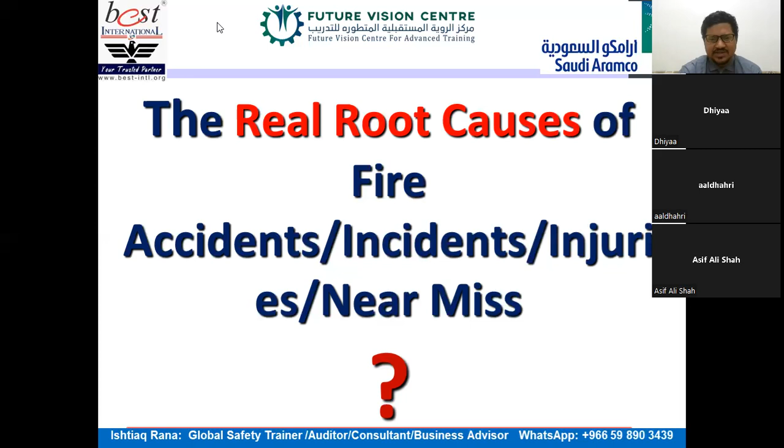But in that context, bear in mind these few pictures I'll highlight, which will give you some idea how sometimes, and here no lack of knowledge - everybody knows overextension boards or over usage of an extension board, overload on any extension board would be dangerous. Especially, that is why plenty of incidents are happening in employees' accommodations, several, because everybody has chargers, laptops, and no time to buy new extensions. The same extension board, they are trying to use it and have no idea what can go wrong.

Housekeeping - poor set and order, poor housekeeping, no standardization is another reason. Accumulation of different waste coming together, hazardous, non-hazardous, flammable, non-flammable, mixing together - again, you are creating more probability or chances of fire incidents. And sometimes, yes, the behavior, the mindset of our employees, sometimes the unsafe conditions.

So the human, and we all are human beings, you know. I can manage maybe 10,000 machines more easily, but managing 1,000 different brains is one of the most difficult jobs in the world, because everyone is different and everyone is not emotionally so intelligent also. You never know how people can react.

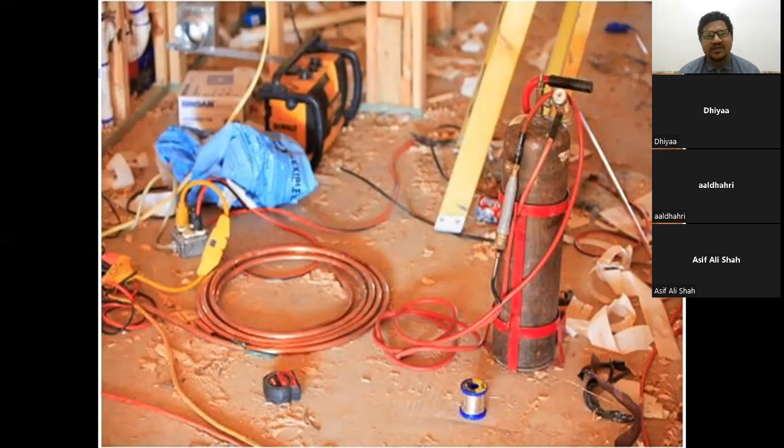Now we are in a position to discuss what is fire. It's not hiring and firing. It's only fire. So we all know it's a combination of oxygen, heat, and fuel, and of course a chemical reaction.

So what is the best idea for firefighting? Fighting fire, at least one element we need to remove, right? Either you remove oxygen, heat, or fuel - at least you have to break this triangle. Fire wouldn't be there anymore. But sometimes it's not easy.

But what exactly can you do to have better control around these three elements and not let them meet together, putting a fire somewhere in a company, God forbid. Because sometimes the owners, the employees are sleeping at home, and within the whole night the company is burned out. And the reason later found is electrical - the joints were there. So because of overload, because of less load, because of short circuit, the whole company is burned out.

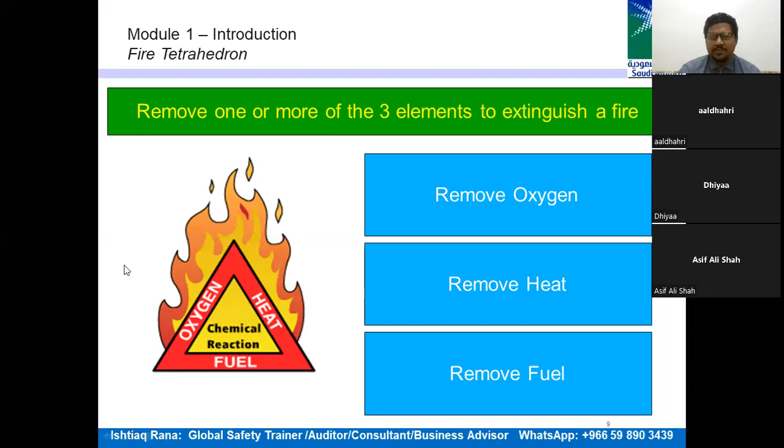Now, how are we going to respond? The first thing is the rescue, then is the alarm, then contain or extinguish. So RACE - race is the important word to bear in mind. Rescue, alarm, contain, and extinguish.

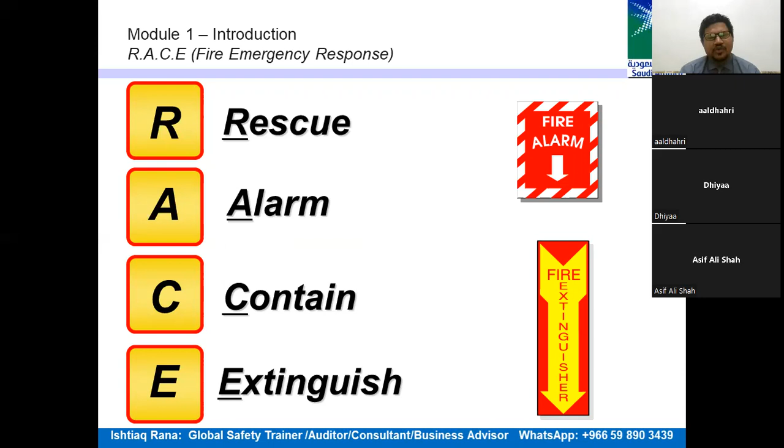Once you remove the other fuel, basically you are containing that fire, not letting it spread to any other areas. So you keep it contained in that area. Otherwise, you extinguish - you take the fire extinguisher and follow the PASS process.

We call it pull, aim, squeeze, and sweep. If somebody asks you how to use a fire extinguisher, tell them it's simple. We need to follow PASS, the word, the 4 steps of PASS.

That means pull the pin. If you see the picture - pull the pin, aim at the fire, squeeze, you need to press the handle, and then sweep. Sweep like this, but at the bottom of the fire, not in the middle, not at the top, from the bottom. You create a layer, and of course you have to be very sure about the wind direction - what is the wind direction?

Keep your distance from the fire, because your safety must be your first priority, even as a firefighter.

If you have any fire extinguisher available in your office, you can have a look at it. The first step is to pull the pin, but don't pull it yet, because I'm just sharing practically, like you can see the fire extinguisher available already in your office.

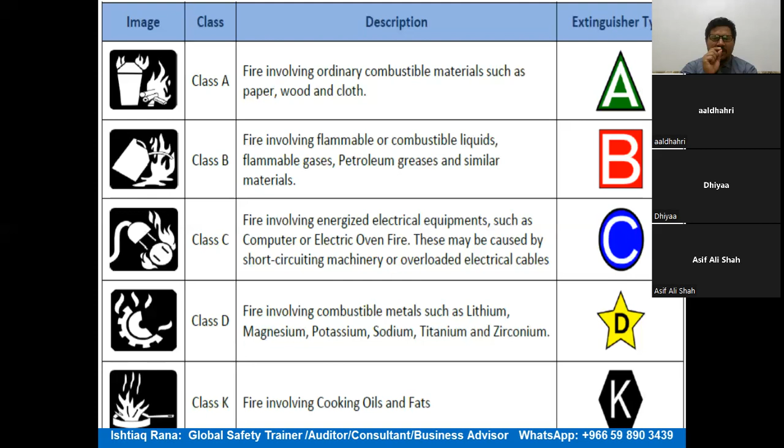So there are 5 classes of fire: class A, B, C, D, and K. What's important for us to understand is that any fire caused by combustible materials such as paper, wood, and cloth falls into the class A category.

Class B is all relevant to fire involving flammable or combustible liquids, flammable gases, petroleum greases, and similar materials. That all falls under class B.

Then there is class C, which means fire from energized electrical equipment such as computers, electric ovens, etc., possibly caused by short circuiting machinery or overloaded electrical cables. So that's class C.

Then there is class D, involving combustible metals like lithium, magnesium, potassium, sodium, titanium, or zirconium. These are some of the combustible metals, and that all falls under class D.

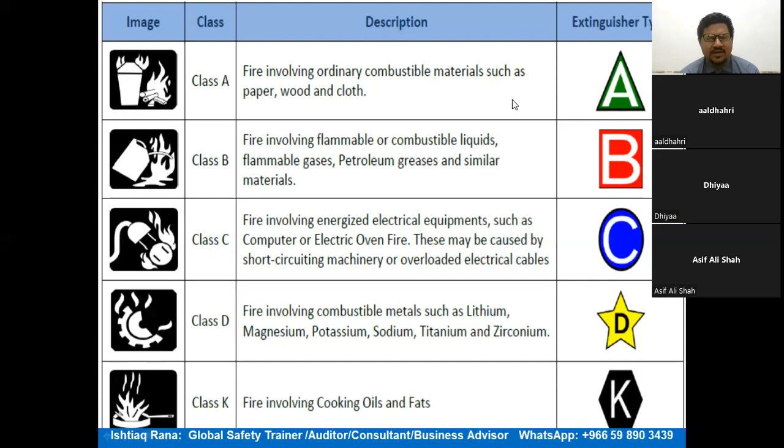Now, according to the class, which fire extinguisher we have to use, we are going to discuss in the next slide. Class K is fire involving cooking oils and fats. Normally, if you don't have a kitchen, it's not a very big risk, but if you have a kitchen inside your office or even at your site somewhere, you surely have to understand class K also, and how to fight that.

So what you are doing is breaking that triangle of heat, fuel, and oxygen. Sometimes you remove heat, no more fire. Sometimes you remove oxygen, again no more fire.

If you have a lighter, whether you're a smoker or not, just put your hand up over it. That means you are stopping the oxygen. Now click it several times, there won't be any fire, because you've stopped and eliminated the oxygen supply, so fire will not start. Even though heat was there, creating a spark, and even though the fuel, the petrol, is already there inside your lighter. Now remove your hand, don't put your hand at the lighter.

Now make sure, if there is no fuel, even if you click and oxygen is there, heat is there, still no fire. This triangle has to meet together and create a chemical reaction, then of course the fire would be there. So for class A, we can use water. And what is class A?

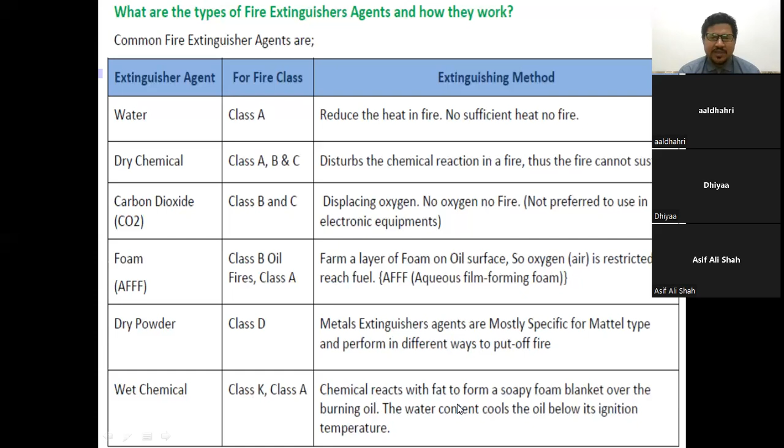Otherwise, for the wet chemical, we use it for class K and A. The chemical reacts with fat to form a soapy foam blanket. I'll share some videos that will give you practical insights into what I'm talking about, and how different types of fires are managed by using different extinguishing mediums.

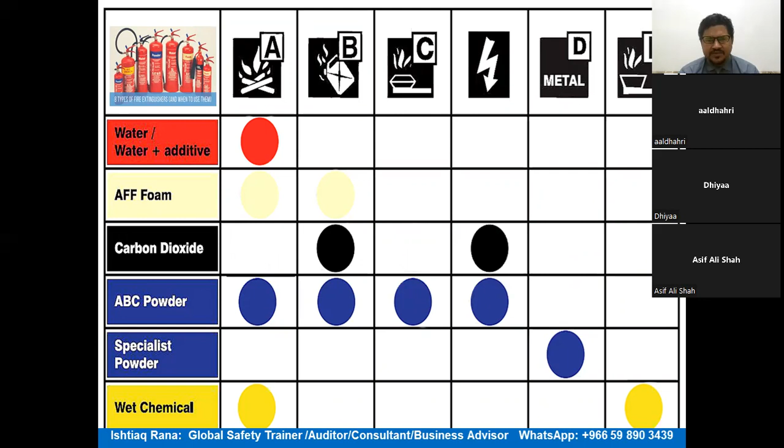We can make a chart like this and put it somewhere on our notice boards, so it will help people understand, for which type of fire, what type of fire extinguisher or extinguishing media they have to use.

Now, what are the key responsibilities of the firefighters. It's a very quick kind of reaction, if somebody reports there is a fire; if nobody reports it, the system should report. That is why we have heat detectors, smoke detectors, fire alarm systems, and locations and zones are divided. So our fire panel will start blinking, and even the sound is there, so we can find the location quite easily, in which zone number, in which particular office number this issue has arisen.

So the firefighters can directly go there. If that location is not easily traceable, then it will be too late, God forbid. That is why our addressable fire alarm system should be in place. I repeat again, our addressable fire alarm system should be in place and fully active.

Sometimes we have it, but our fire alarm is not giving the correct messages, or maybe there's no maintenance. You have an outside third party company, but they're not doing their job the way it should be, and ultimately your system is not responding in case of emergencies, because you need to know the location immediately.

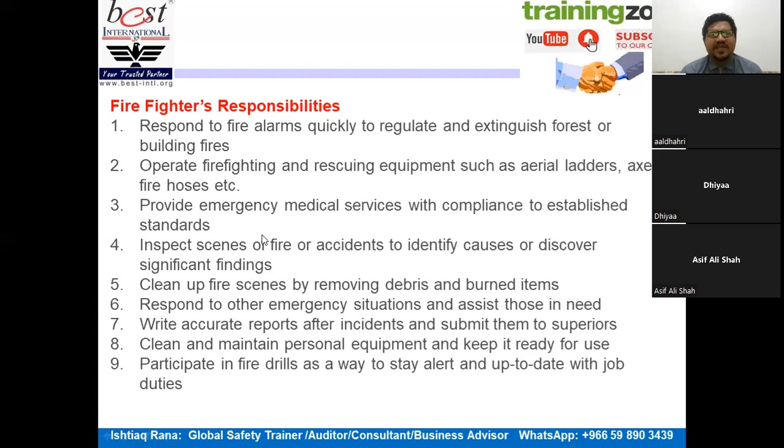Whenever you believe the fire extinguishers are ready for refilling, or you are going to send them for refilling, have a firefighting drill. Use that powder, use that extinguisher to train your employees, and then send it for refilling. But make sure you have a backup. Sometimes two sets are there: one is going for filling, the other you are putting on the walls again, so you don't leave the area empty without fire extinguishers.

There must be some fire watches, used for spot management. If any hot work is going on, especially working with Saudi Aramco projects, then a fire watcher is mandatory. Even in the work permit, you have to agree who will be the fire watcher, what is the ID, and the name or something like that. But make sure that fire watcher is there, and he must be well trained, especially how to use a fire extinguisher.

How to ensure housekeeping all around, and making sure he has an understanding of any expected ignition sources and how to manage them. He will not let anyone keep flammable materials near this hot work, maybe up to 35 feet or more. He will not let anybody put any flammable material within that area, especially if the project belongs to a confined space, which is already a terrible red zone, because the smallest mistake and it's hard to get a second chance. That's why we need fire watchers.

So they are the spot responders. If a small fire comes out from the welding process, they'll use a fire extinguisher. Any hot work going on, we need a fire watcher, and fire watchers and firefighters on the same project. Sometimes people use the same person, but it is recommended the firefighting team should be entirely separate.

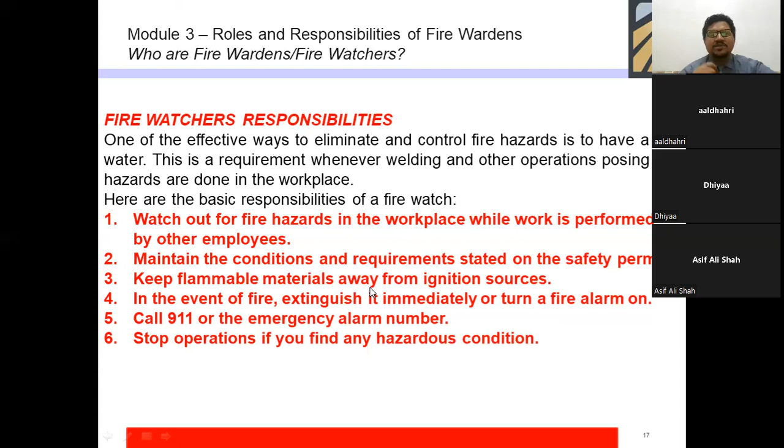How to call 911. It's not just the fire watcher, even every employee of your company must be trained in emergency reporting, like how to call 911. They must be trained enough.

Fire wardens, like I told you, help you evacuate and make sure no one is left inside. They're responsible for head count also. They have a fire safety plan for their respective building or site.

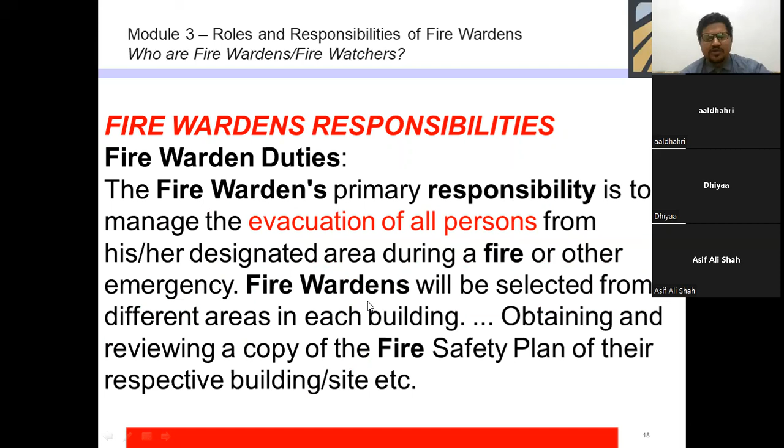No harm in having a safety committee, and make sure there are some leaders, fire team leaders, fire wardens, and fire watchers. They'll be under fire team leaders. And of course, the supportive department: you need security, telephone operators, and the firefighting team. That means you, so fire wardens, fire watchers, and the firefighting team.

And why do we all need to make sure our interested parties, our stakeholders, especially our employees, contractors, and visitors are safe? If I'm coming to your site, my safety, no doubt, is my responsibility. But since I'm your guest, you also have to play some role.

Maybe you will give me induction, telling me the restricted areas, and guiding me that these are the areas you are not allowed to go, and don't go anywhere without one of our employees, or without a guide. Actually, don't go in any area, because I'm the visitor. You are living there 8 hours, working 12 hours every day, so you know much better than me about your site.

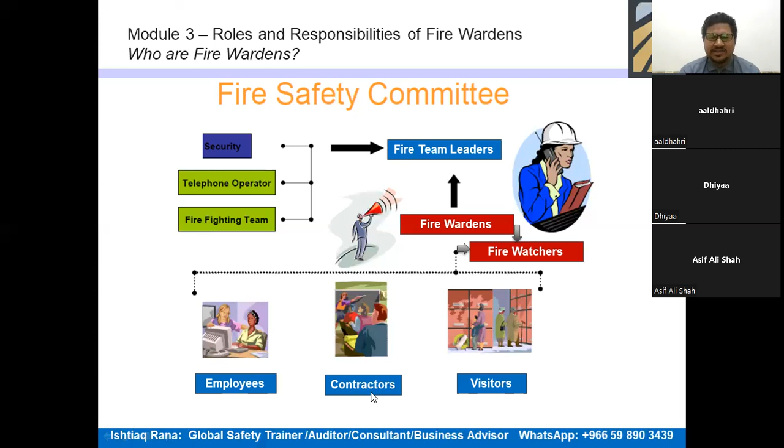How many restricted areas are there? What are the lines of fire you have defined? I need that induction. In case of emergency, to whom do I need to report, where are the muster points, where are the restricted or prohibited areas. As a visitor, I'm not allowed to go there, so all these things must be part of my induction program, the safety induction. Sometimes we miss that, because since I'm the safety auditor as well, several times I personally noted they don't give induction yet, but the guys are already on site.

Fire prevention is better than firefighting. Firefighting means you are waiting for the fire incidents or something to happen. No, surely you have to fight, you have no other option, right? But prevention is important. So how can you prevent fire?

Make sure you are managing the major causes of industrial fires, like combustible materials, electrical problems. You need to reduce them 100%. It might be challenging, but at least you try every day to make sure no electrical issues are there. Heat and ignition sources are well identified and controlled also, and machinery and smoking, like a no smoking policy must be well published, especially within your company premises, especially in confined spaces where it's zero tolerance, no smoking at all.

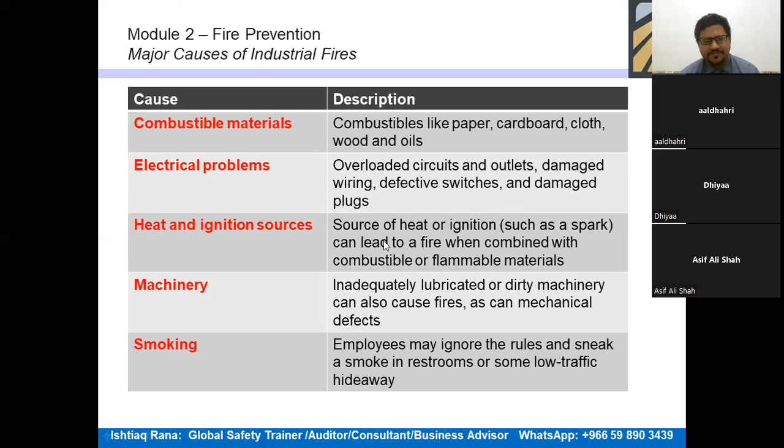And there must be some safe smoking areas that should be used by the smokers. Firstly, you must discourage, or encourage them to leave this smoking habit. But if you believe they'll not leave, then make sure you deploy or designate an area as a smoking area for the employees. The ultimate challenge is to remove one of the elements of this triangle, either oxygen, heat, or fuel.

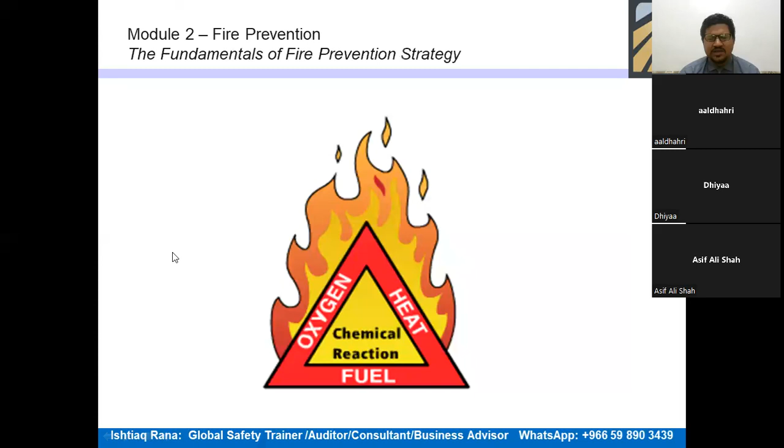Fire risk assessment should be done through your safety department. Some companies have started hiring a fire specialist separately, or fire safety engineer, same like process safety engineers, because it's an engineering job as well. Like we have a safety officer, but he's mostly busy in documentation, inspection, and all that. But we need people who have some engineering background, so they'll go deeper to understand the process.

And the root causes, and proactively they'll be putting some plan in place. So the fire risk assessment should be done through engineers along with the concerned department heads, even by involving the employees. It's not like I'm the safety professional and I'll be doing everything, with no need of involvement of any other gentleman here. It shouldn't be one man show. If you are doing risk assessment, it should be teamwork rather than doing it by yourself.

But what exactly do we need for fire risk assessment? It's a process of gathering information, like all the information about the BOQ. In my case, if there is a building and I need to go for fire risk assessment, I'll ask where is the BOQ, bill of quantity, whatever material you have used, either flammable or non-flammable, as per which international standard you purchased them, how many incidents previously happened, God forbid, within the same building, any fire incident.

So I'll collect the data, check the history, ask several questions, and get the complete data of that building, and then try to start my risk assessment process with more practical intention. Then fire hazard identification, I would go around the site, maybe the building, every nook and corner I'll be visiting and find out, maybe with a fire hazard identification checklist and all that. That would also be another element, but it should be part of information gathering.

Information gathering means finding out where they are today and how they are managing, how they are conducting this fire risk assessment. Then you go for fire hazard identification, then you evaluate and make sure you identify the red zone areas, which are the issues that have more probability of being the reason of a fire incident. So you start controlling those areas first, and of course it's a game of implementation. Once your plan is ready, all controls you have decided, now implement those controls and make sure you have a periodic review as well.

And this is how, as a fire safety management system, you try to have some policies, procedures, different kinds of controls and precautions well implemented. Bear in mind, implementation can never be effective until you train people. So training, training, and training, sometimes even refresh training, because you are implementing what you want to implement.

How many systems are there? Like firefighting, the fire safety management system, fire prevention system, waste management system, your shop floor management system, meaning full housekeeping standardization, and plenty of environmental management systems. It's a combination of different management systems well implemented, and this is how you are supporting and making sure of less chances of fire incidents.

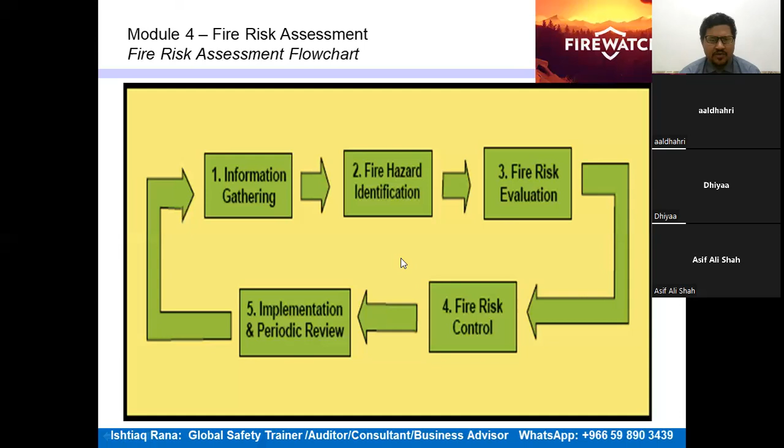So the controls we can't implement until we have complete evaluation, and once the controls are defined, make sure you implement them properly, and there must be a periodic review. This is the process of fire risk assessment.

And this is how you will find the areas rated as major, moderate, medium, or high. Every company has a different magnitude, like they might give numbers 1 to 5. So 5 multiplied by 5, if the risk comes to 25, they will rate it as high. That's all your safety department would be doing.

But make sure whichever area you are mostly concerned about for fire incidents, ask your safety department, can you share with me the fire risk assessment of that particular area? That should be your interest, since you are going to be the firefighter. Make sure you understand the sensitivities of each area.

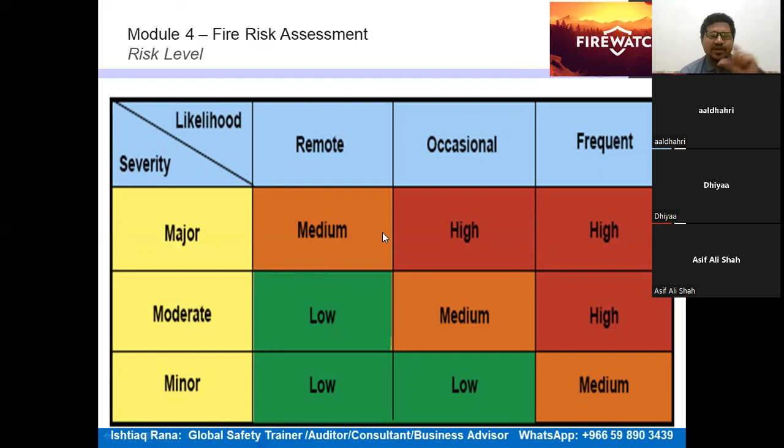So there is likelihood and consequences, very likely, unlikely, or highly unlikely. Once we do fire risk assessment, we get a rating like low, medium, and high. Of course, if it is high, more fatalities, more major injuries could be possible, even minor injuries. But that risk assessment must already be there. Otherwise, if you are the one going to do it, make sure you have separate fire risk assessor training. This is a separate, detailed training session.

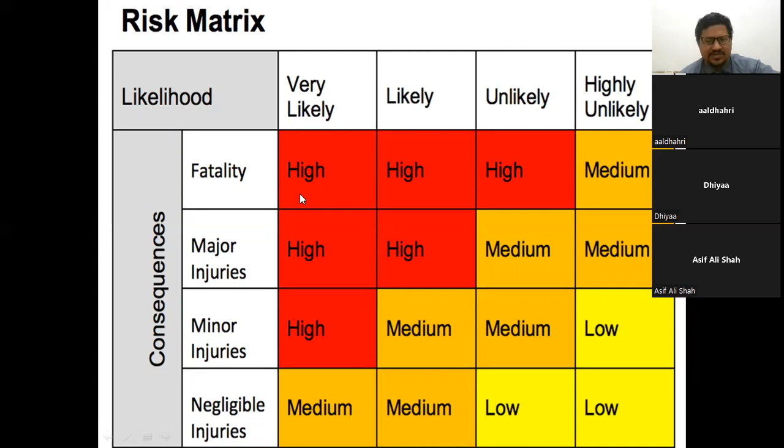But here I'm just giving an overview. Whichever area you are concerned about, just ask your safety department, can you share with me the fire risk assessment of that particular area? Then you would have a better understanding. So how can we put some controls? There is a hierarchy like elimination, substitution, engineering controls, administrative controls, and PPEs.

Like if you're using solvent based paint and it's extremely flammable, eliminate it and find a substitution, use another paint, water based, which is non-flammable or very less flammable. So in that context, you are eliminating the extremely flammable materials and bringing in materials with zero flammability. Otherwise, you start implementing engineering controls, administrative controls, and PPE.

Engineering controls, elimination and substitution, we can put them under engineering also. Sometimes we do overhauling, remove some of the parts, make sure the right maintenance of our tools and equipment. And what we are doing is minimizing the chances of fire incidents also.

Otherwise, we rely on administrative control. We give trainings, we have complete different checklists, warning signs, proper trainings, toolbox meetings, induction programs. So all this comes under administrative controls. And ultimately, the last solution is the PPE, but I would say the appropriate, suitable PPE, personal protective equipment.

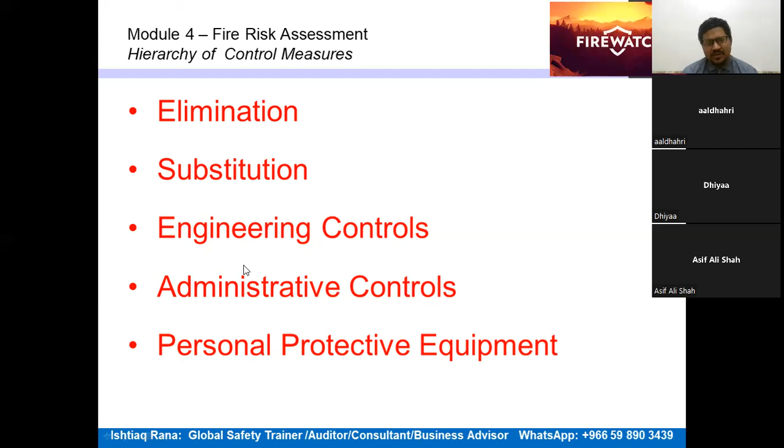So these are some of the parts we have as a fire safety system. Make sure you have smoke or heat detectors, break glass, manual call point, alarm panel, exit staircase, so easily you can go to the muster point, fire door, sprinkler, corridor, lobby, staircase, escape route, hose reel, and extinguisher.

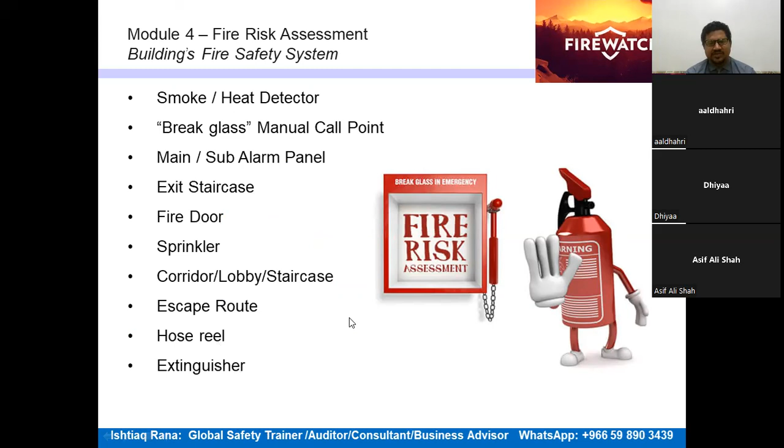Sometimes you are creating so many new areas, but this plan is not updated. So you can have a look into it, and no harm to have a fire evacuation drill and note down the time, within how many minutes or seconds the people come outside the site or building and go to the muster point or assembly area. So it's kind of a practical demonstration.

Whenever you have fire drills or fire evacuation drills, collaborate everything and train each individual. And for that reason, companies sometimes call us as a third party, just as a watcher, a silent observer, making sure that you guys are following the right set of procedure. And we will give a report, either it's a successful or unsuccessful fire drill, along with some corrective preventive action.

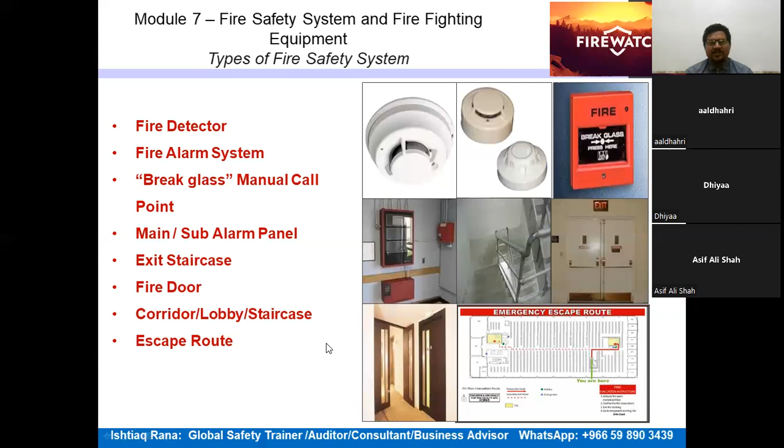If you get excellent services from your third-party companies, you are supporting your business operations excellently. This is how you create a business excellence management system for your business continuity, optimizing all your processes every day. So I hope it will help, inshallah.

Make sure that whatever company you hire as a contracting company, when they come and check the complete system, they're not giving you the wrong report. Ask them, we need a genuine report. If something needs to be changed, buy the new one and tell them to change it. But don't just give us okay, okay, okay.

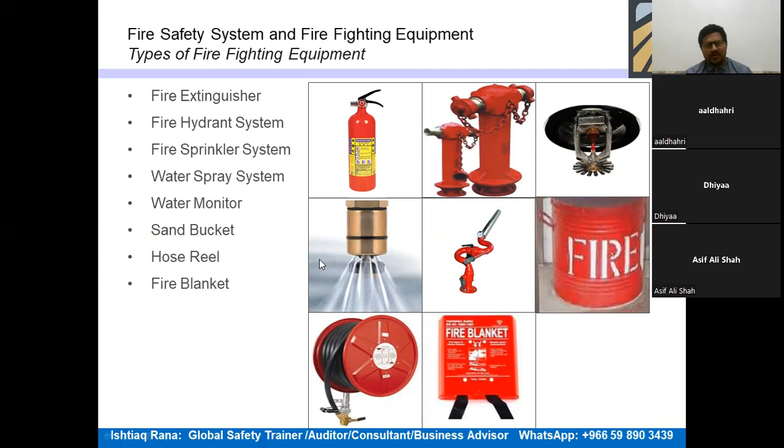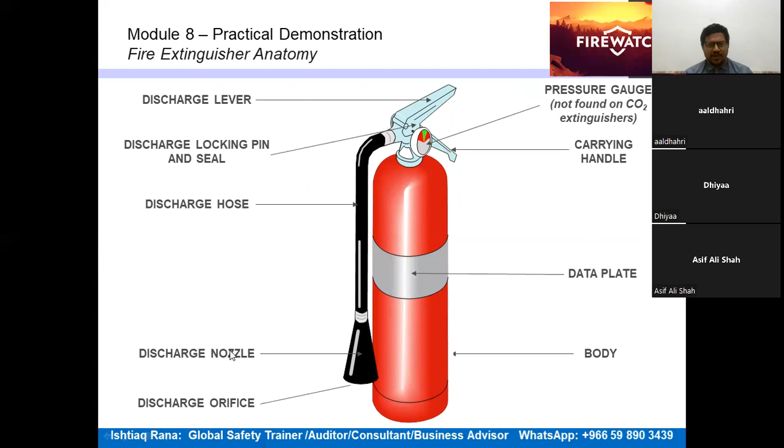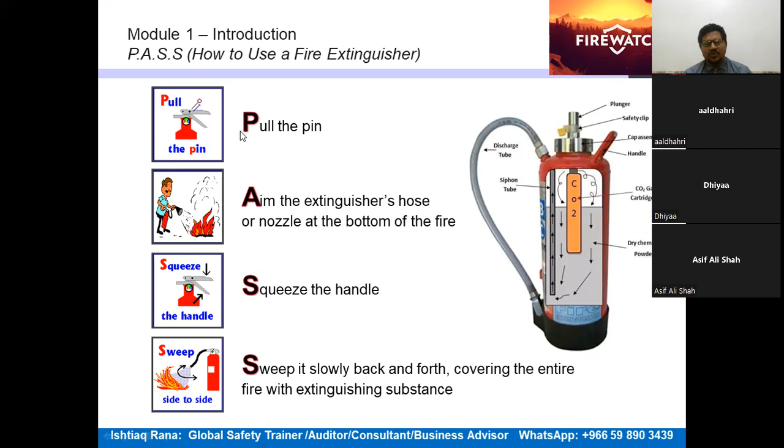Remember the PASS method: Pull the pin, Aim the extinguisher hose, Squeeze, and Sweep. That's how to use a fire extinguisher. Remember this slide too, it's important. You can display it, take a screenshot, it's also available on Google. You'll find several sources of information, but make sure you display them so your employees understand.

So that was all about firefighting. From my side, if you have any question, anything in your mind, your questions are more than welcome. After 15 minutes, we'll start the second session related to electrical safety.